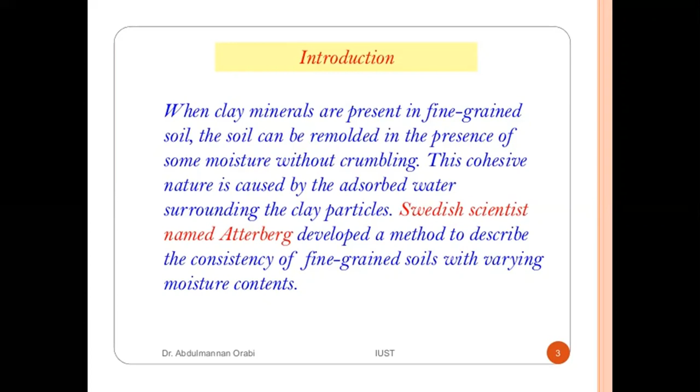This cohesive nature is caused by the adsorbed water surrounding the clay particles. A Swedish scientist named Atterberg developed the method to describe the consistency of fine-grained soils with varying moisture contents. Consistency is the term used to indicate the degree of firmness of the cohesive soil.

The physical properties of clay greatly differ at different water contents. A soil which is very soft at a higher percentage of water content becomes very hard with the decrease in water content.

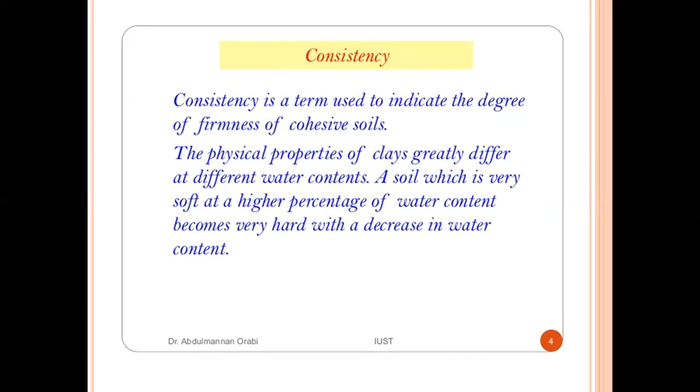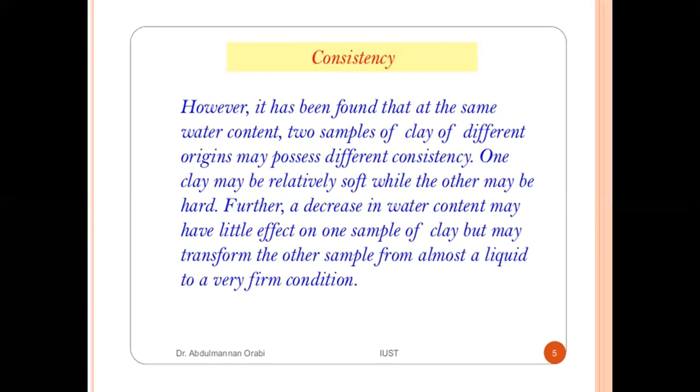However, it has been found that at the same water content, two samples of clay of different origins may possess different consistency. One clay may be relatively soft, while the other may be hard. Further decrease in water content may have little effect on one sample of clay, but may transform the other sample from almost a liquid to a very firm condition.

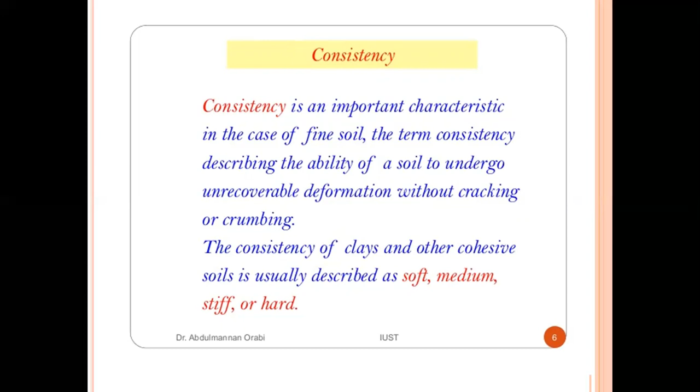Consistency is an important characteristic in the case of fine soil. The term consistency describes the ability of soil to undergo unrecoverable deformation without cracking or crumbling. The consistency of clays and other cohesive soils is usually described as soft, medium, stiff, and hard.

Water content significantly affects properties of silts and clay soils, unlike sand and gravel. Strength decreases as the water content increases, and soils swell up when water content increases. Fine-grained soils with very high water content possess properties similar to liquids.

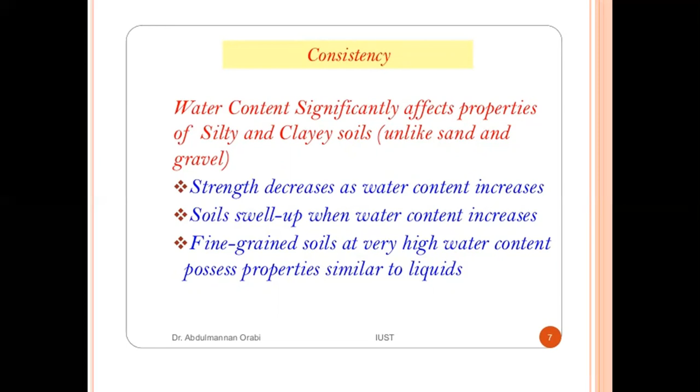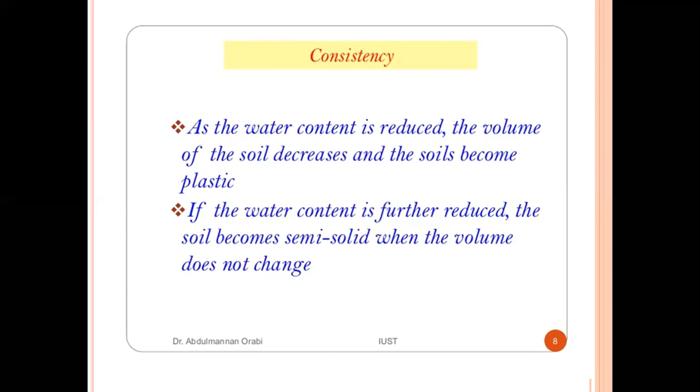As the water content is reduced, the volume of soil decreases and the soil becomes plastic, meaning it reaches the plastic state. If the water content is further reduced, the soil becomes semi-solid, where the volume does not change.

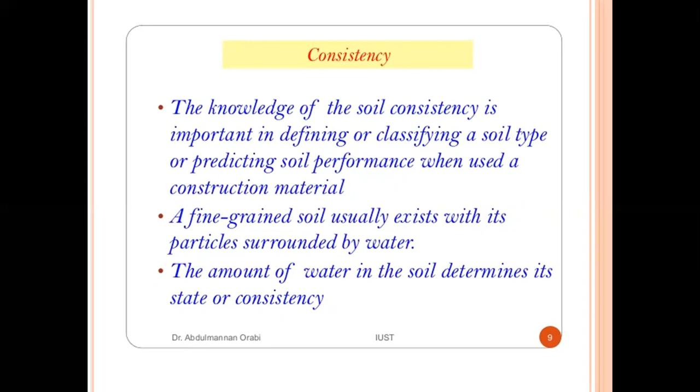Knowledge of soil consistency is important in defining or classifying a soil type, or predicting soil performance when used as a construction material. As fine-grained soils usually exist with particles surrounded by water, the amount of water in the soil determines its state or consistency.

The consistency of fine-grained soils refers to the firmness, which varies with water content of the soil. As the water content gradually increases, it causes the soil to change from solid to semi-solid to plastic to liquid states.

One state is the solid state, after which it converts to semi-solid, then changes to plastic state, then to liquid state. The water content at which the consistency changes from one state to another is called consistency limits or Atterberg limits.

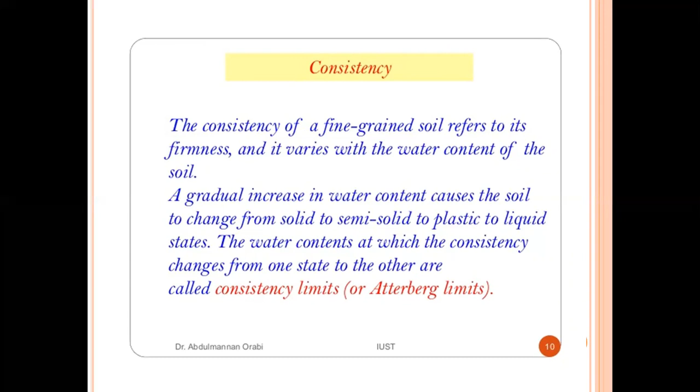At very low moisture content, soil behaves more like a solid. When the moisture content is very high, the soil and water may flow like a liquid; hence these are defined on an arbitrary basis.

Depending upon the moisture content, the behavior of the soil can be divided into four basic states: the solid state, semi-solid state, plastic state, and finally the liquid state. These are the four states defined by Atterberg limits or consistency limits.

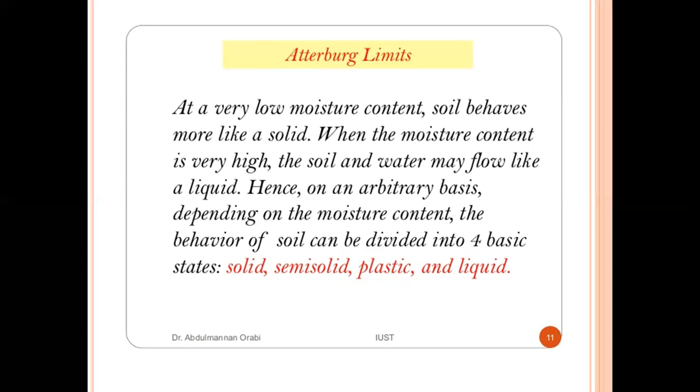So this is the Atterberg limits. The Atterberg limits are the limits of water content used to define soil behavior. This water content depends upon the soil behavior; the soil changes from one state to another state.

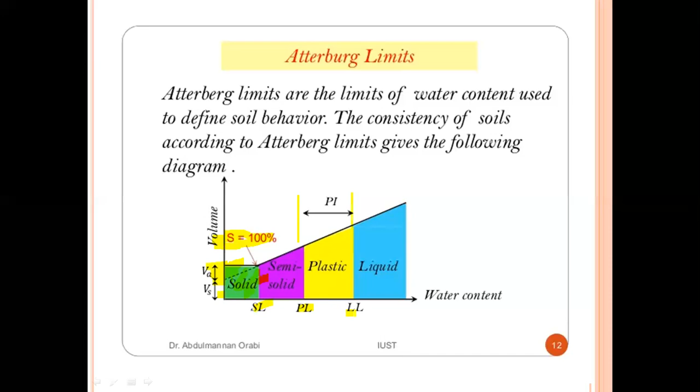Here S is the 100%, meaning saturation of the soil in solid state. The shrinkage limit is SL, plastic limit is PL, and liquid limit is LL. These three limits are known as shrinkage limit SL, plastic limit PL, and liquid limit LL.

In this, the shrinkage limit is in the solid particles, as shown in the figure below. The values of these limits can be obtained from the laboratory test.

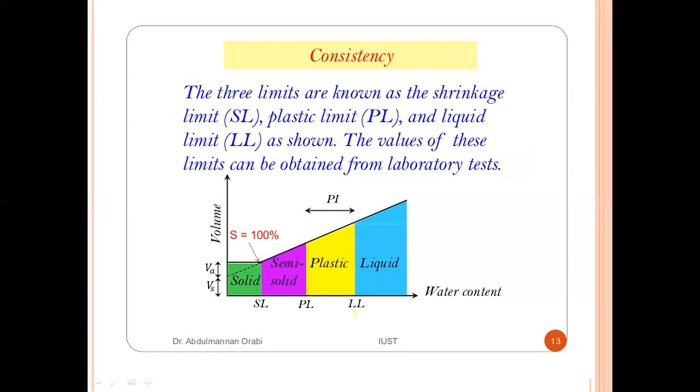The importance of the consistency limits, the Atterberg limits: if you know the water content of our sample relative to the Atterberg limits, then we already know a great deal about the engineering response of our sample.

As water content is reduced, the volume of the soil decreases and the soil becomes plastic. If the water content is further reduced, the soil becomes semi-solid, when the volume does not change.

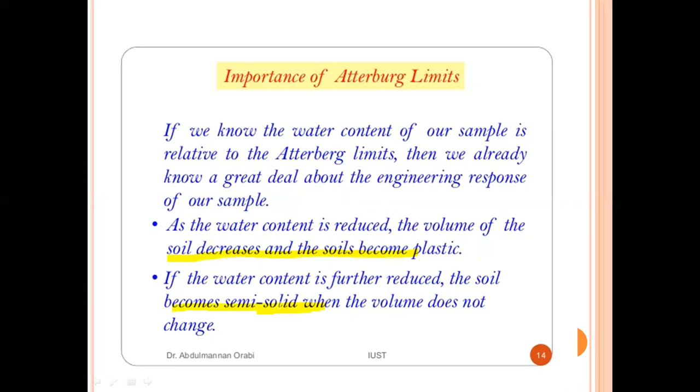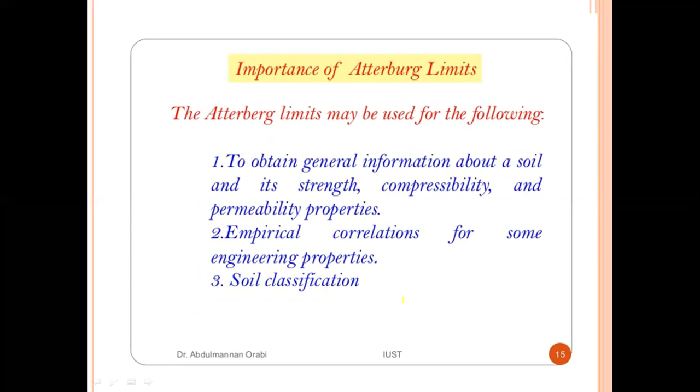Atterberg limits may be used for the following: to obtain general information about the soil's strength, compressibility and permeability properties, for empirical correlations for some engineering properties, and for soil classification.

The first one is the liquid limit. The liquid limit is defined as the water content at which the soil changes from the liquid state to the plastic state, meaning the soil's behavior changes with water content.

The liquid limit is generally determined by the standard Casagrande device. The procedure for the liquid limit test is given by ASTM D4318.

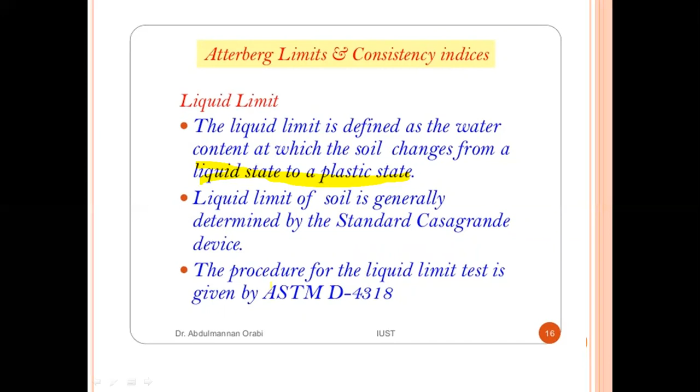Casagrande defined the liquid limit as the water content at which a standard groove cut in the remolded soil sample will close over a distance of 13 mm (half an inch) at 25 blows, with the cup falling 10 mm onto the hard rubber base.

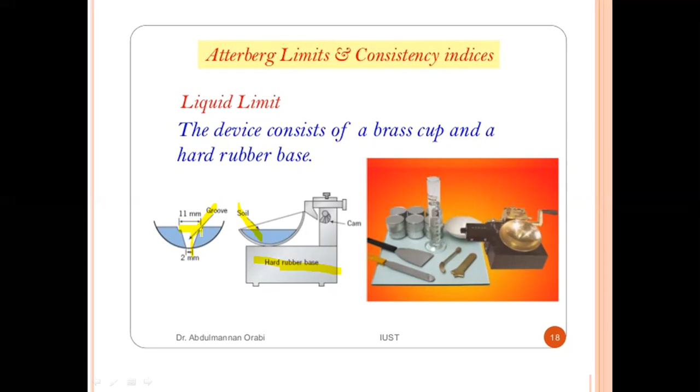The soil requires 25 blows. To perform the liquid limit test, one must place soil in the cup. A groove is then cut at the center of the soil pat using the standard grooving tool.

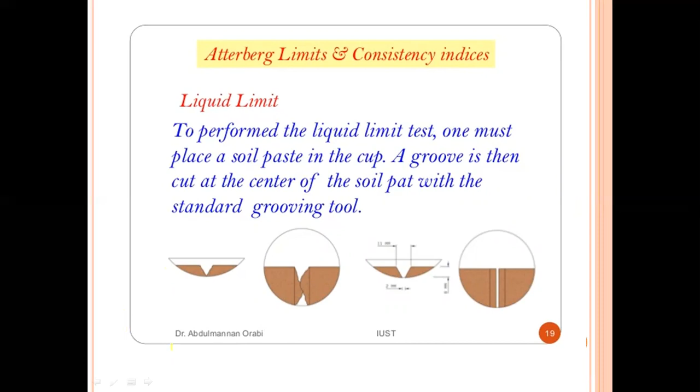The liquid limit device uses a crank-operated cam. The cup is lifted and dropped from a height of 10 mm.

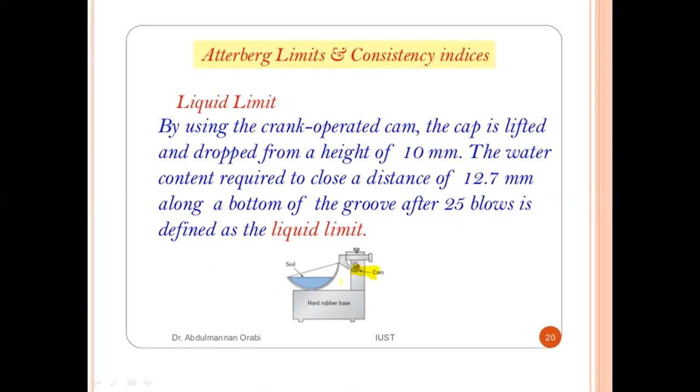The water content required to close the distance of 12.7 mm along the bottom of the groove after 25 blows is defined as the liquid limit. This shows the grooved soil pat in the liquid limit device.

See the figure: this is the grooved soil, and this is the soil pat after the groove has closed.

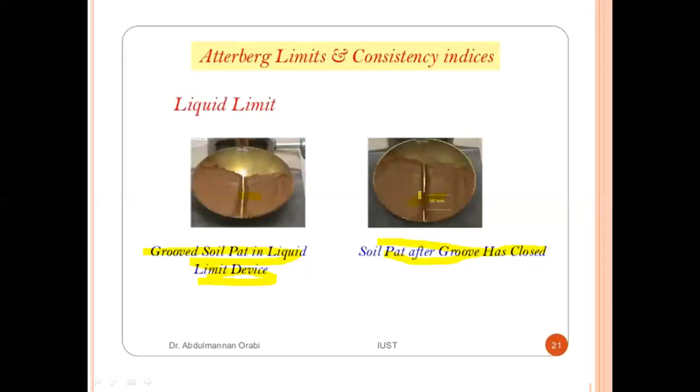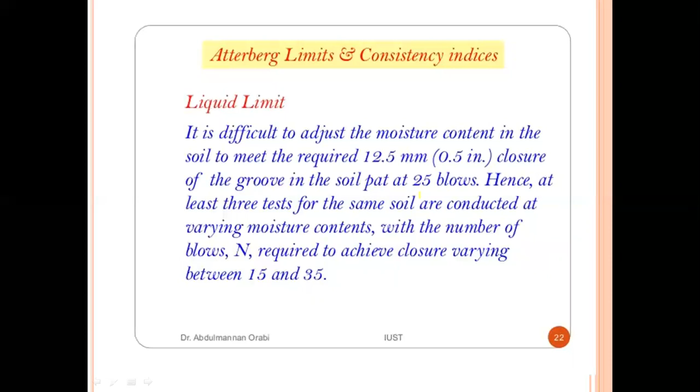It is difficult to adjust the moisture content in the soil to meet the required 12.5 mm (half inch) closure of the groove in the soil pat at 25 blows. Hence, at least 3 tests are conducted for the same soil at varying moisture content, with the number of blows (n) required for closure varying between 15 and 35.

In the liquid limit test, the moisture content of the soil (in percent) and the corresponding number of blows are plotted on semi-logarithmic graph paper. The relationship between moisture content and log n is approximated as a straight line.

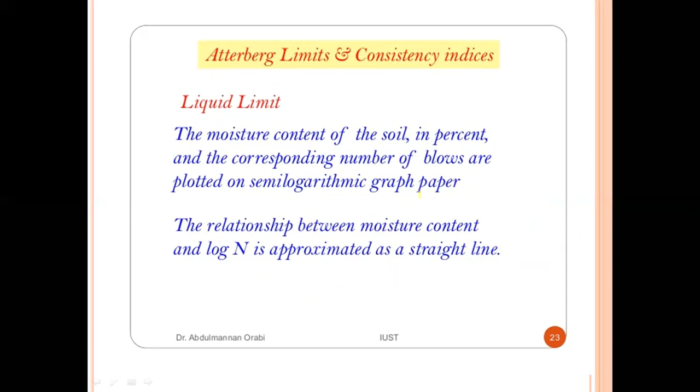Plot the number of drops (n) on the log scale versus the water content (W). Draw the best-fit straight line through the plotted points; this line is referred to as the flow curve. The moisture content corresponding to N25, determined from the flow curve, gives the liquid limit of the soil.

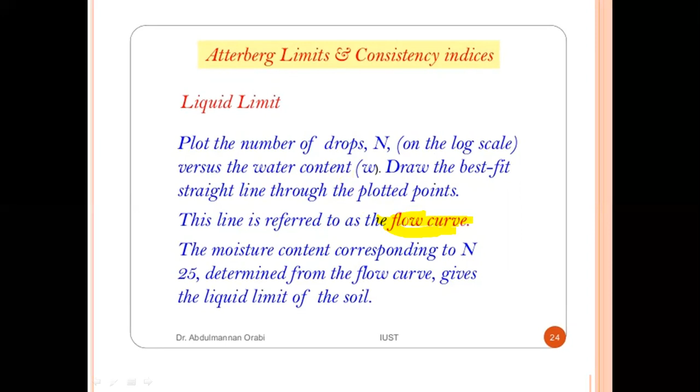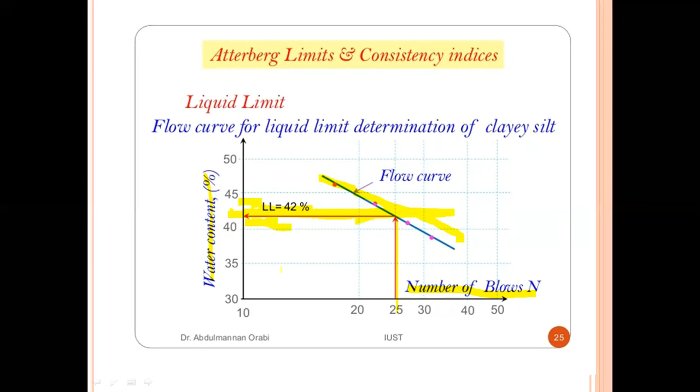Next, the US Army Corps of Engineers developed an empirical equation of the form LL (liquid limit) equals Wn times (n divided by 25) raised to the power of tan beta, where n equals the number of blows in the liquid limit device for the 12.5 mm groove closure, and Wn is the corresponding water content. tan beta equals 0.121, but note that tan beta is not equal to 0.121 for all soils.

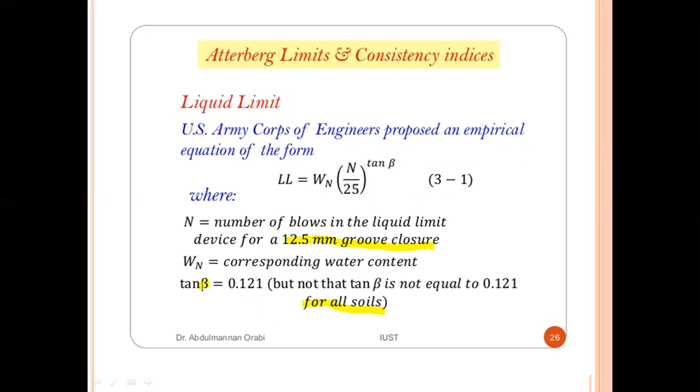The beta value changes depending on the soil. This equation generally yields good results for the number of blows between 20 and 30. Beyond this range, the yield breaks down or collapses.

This procedure is generally referred to as the one-point method and was also adopted by ASTM under designation D4318. The reason the one-point method yields fairly good results is that a small range of moisture content is involved when n equals 20 to 30 blows.

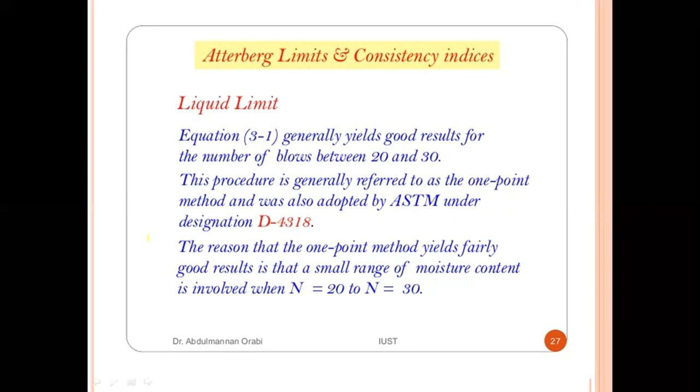The fall cone method is in the British standard BS 1377. It is another method of determining the liquid limit, popular in Europe and Asia. In this test, the liquid limit is defined as the moisture content at which a standard cone of apex angle 30 degrees and weight 0.78 newtons (80 gram-force) will penetrate a distance equal to 20 mm in 5 seconds when allowed to drop from the position of point contact with the soil surface.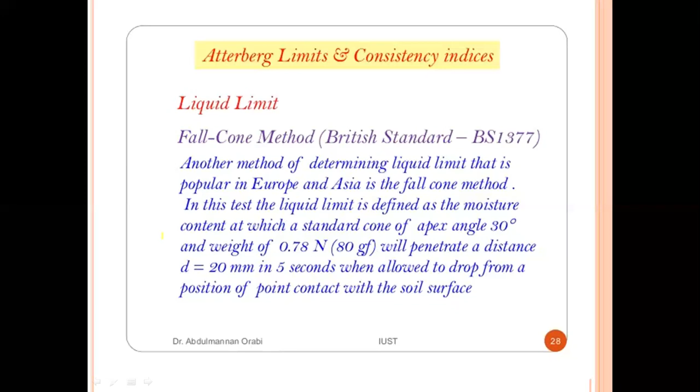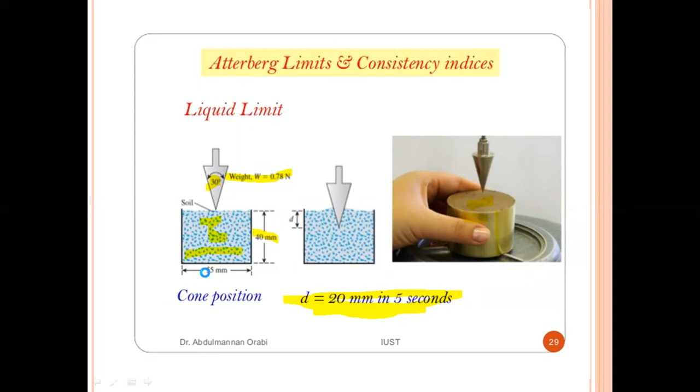This figure below shows a photograph of the fall cone apparatus.

Due to the difficulty in achieving the liquid limit from a single test, 4 or more tests can be conducted at various moisture contents to determine the fall cone penetration D. This is the fall cone penetration apparatus.

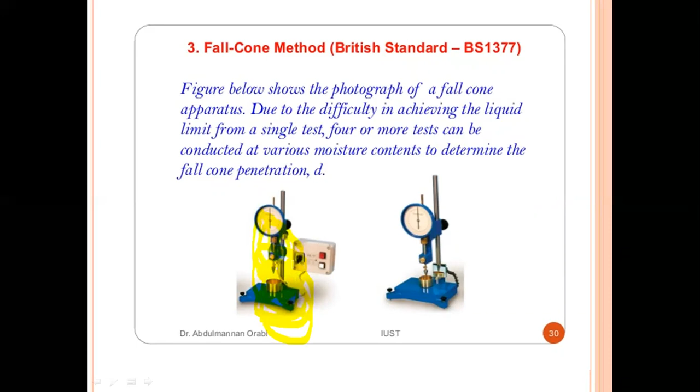A semi-logarithmic graph can be plotted with moisture content W versus cone penetration D. The plot results in a straight line. The moisture content corresponding to D equal to 20 mm is the liquid limit.

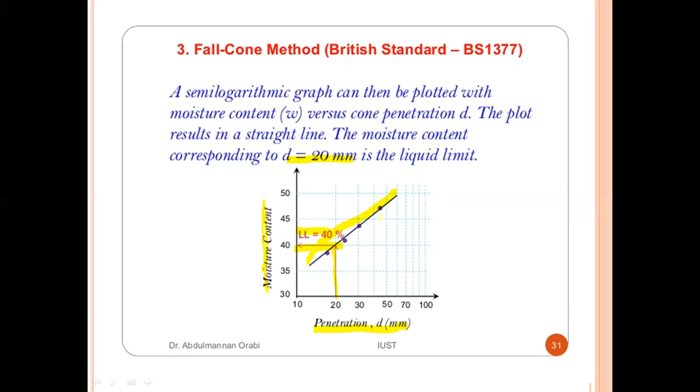This is the semi-logarithmic graph in the fall cone method.

Next, consistency limits are the Atterberg limits. The second method is the plastic limit, denoted PL, between liquid limit and plastic limit. The plastic limit is defined as the water content at which the soil changes from plastic state to semi-solid state. At this state, the soil mixture is deformed to any shape under minor pressure.

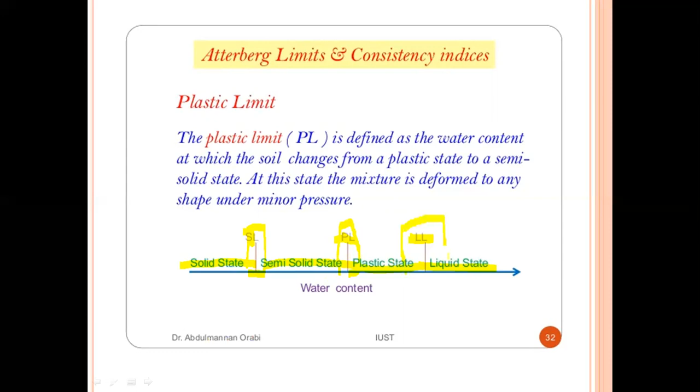So it is based on water content. First is the solid state, second is the semi-solid state, then plastic state, then liquid state. Shrinkage limit SL, plastic limit, and liquid limit mark these transitions. As water content increases, solid state converts to semi-solid state, then plastic state, then liquid state. Solid to semi-solid state transition forms the shrinkage limit; semi-solid to plastic state transition is the plastic limit; plastic state to liquid state transition forms the liquid limit.

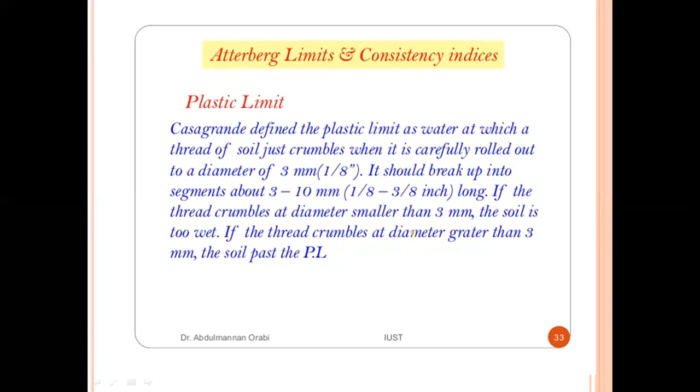Casagrande defined the plastic limit as the water content at which a thread of soil just crumbles when carefully rolled to a diameter of 3 mm (1/8 inch). It should break into segments about 3 to 10 mm (1/8 to 3/8 inches) long. If the thread crumbles at a diameter smaller than 3 mm, the soil is too wet. If it crumbles at a diameter greater than 3 mm, the soil has passed the plastic limit.

This is the plastic limit test procedure performed by hand. The plastic limit test is simple and performed by repeated rolling of an ellipsoidal-sized soil mass by hand on a ground glass plate. This process for the plastic limit test is given below, designated ASTM D4318.

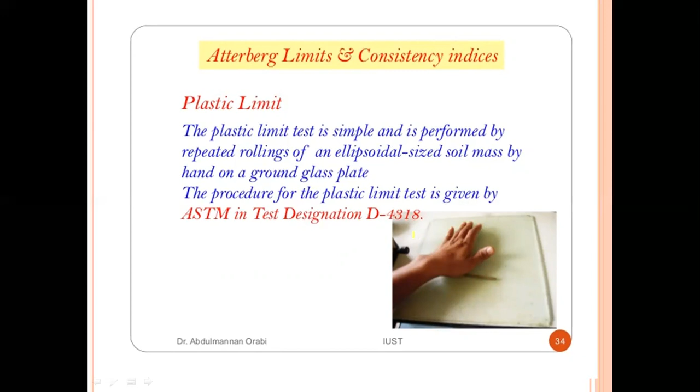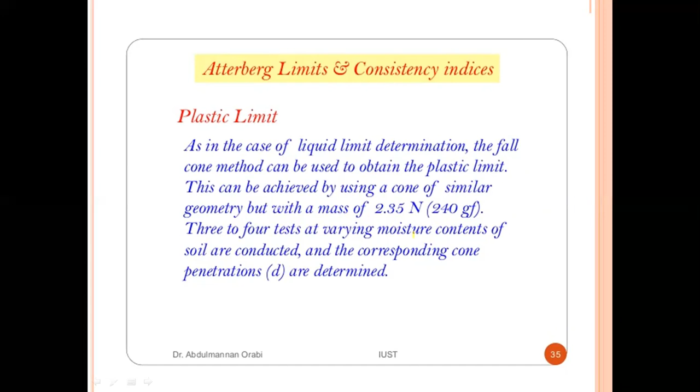As with liquid limit determination, the fall cone method can be used to obtain the plastic limit. This can be achieved using a cone of similar geometry but with a mass of 2.35 newtons, that is 240 gram-force. 3 to 4 tests at varying moisture content of soil are conducted, and the corresponding cone penetrations determined.

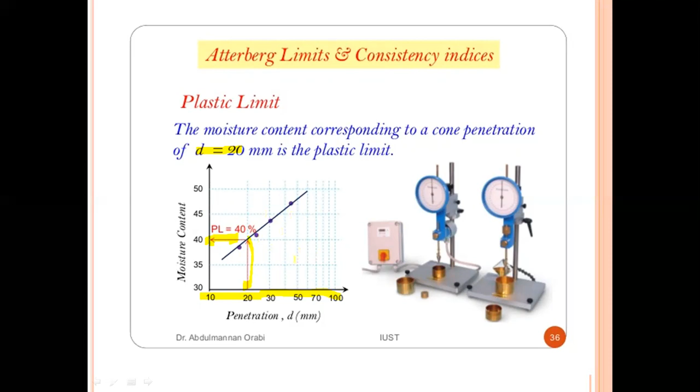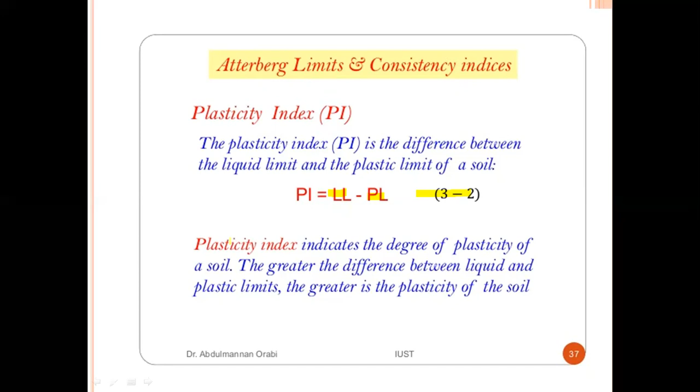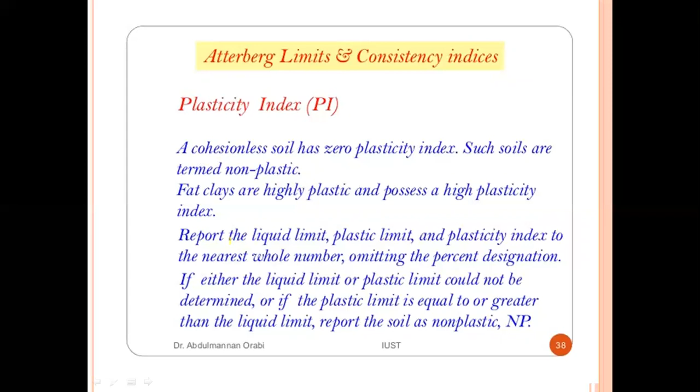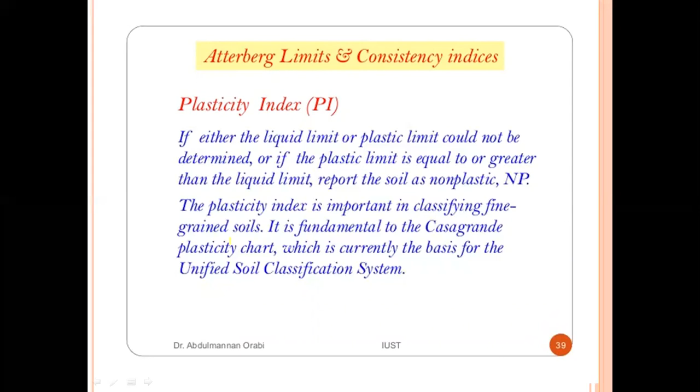Report the liquid limit, plastic limit, and plasticity index to the nearest whole number, omitting the percent designation. If either the liquid limit or plastic limit could not be determined, or if the plastic limit is equal to or greater than the liquid limit, report the soil as non-plastic, NP. The plasticity index, PI, is important for classifying fine grained soils, and is fundamental to the Casagrande plasticity chart, which is currently the basis for the unified soil classification system.

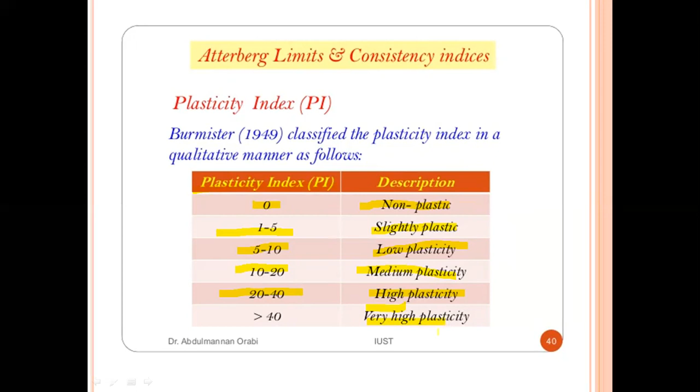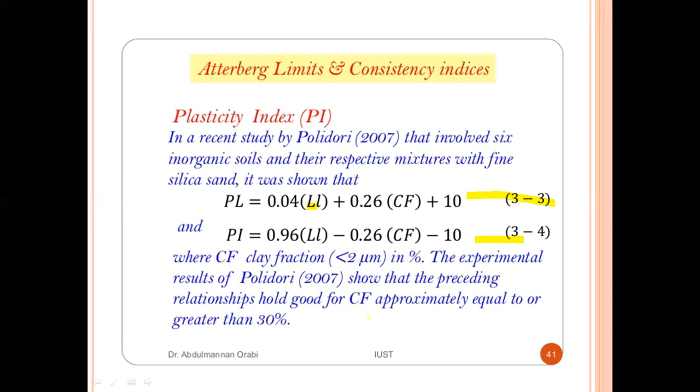The experimental results of Polidori 2007 show that the preceding relationship holds good for CF, clay fraction, approximately equal to or greater than 30 percent.

Report the liquid limit, plastic limit, and plasticity index to the nearest whole number, omitting the percentage designation. If either the liquid limit or plastic limit could not be determined, or if the plastic limit is equal to or greater than the liquid limit, report the soil as non-plastic, NP.

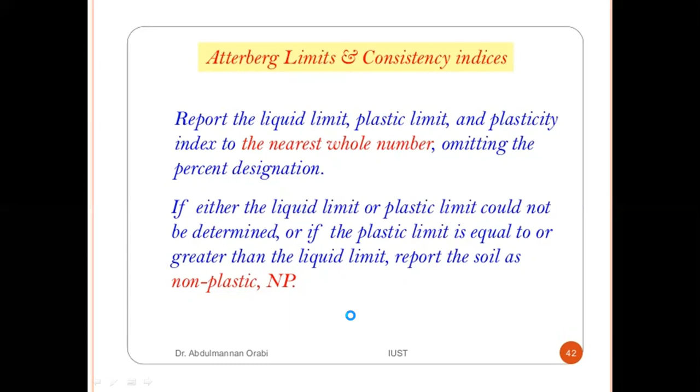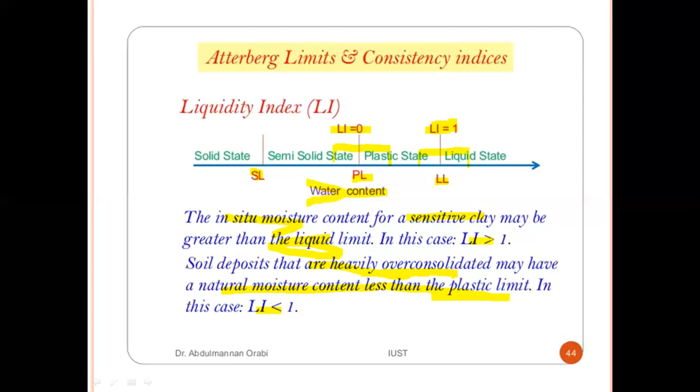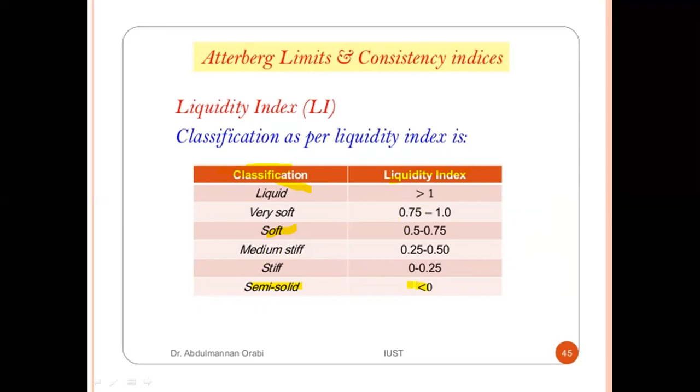Next, the consistency index, CI. From semi-solid state to plastic state, consistency index CI is 1, and from plastic state to liquid state, CI is 0.

We know the shrinkage limit, plastic limit, and liquid limit. CI is the ratio of liquid limit minus the natural water content to the plasticity index. So consistency index CI equals LL minus WC divided by PI, where WC is the moisture content of the soil. This is equation 6.

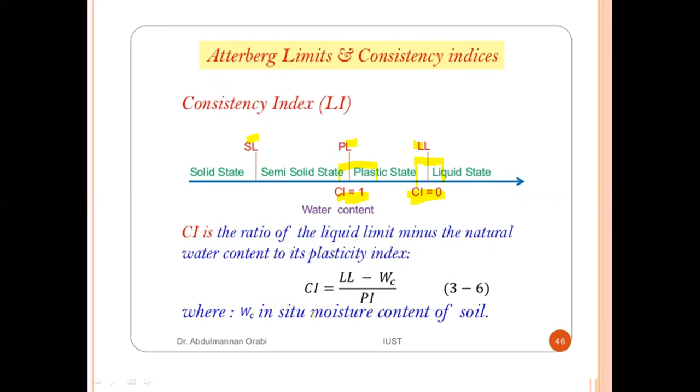Next, clayey soil does not necessarily consist of 100% clay size particles. The proportion of clay mineral flakes less than 0.002 mm in size in the fine soil increases its tendency to swell and shrink with changes in water content. This is called the activity of the clayey soil, and it represents the degree of plasticity related to the clay content.

Activity of the soil is the ratio of plasticity index to the percentage of particle sizes finer than 2 micrometers.

So A equal to PI by percentage by weight of the finer than 2 micrometer. This is equation 7.

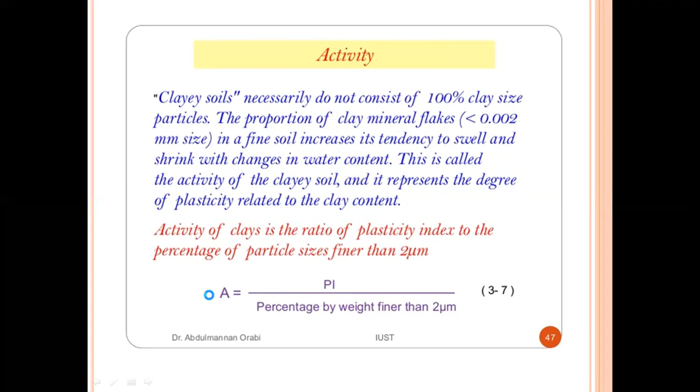Based on equations 3 and 4, Polidori provided an empirical relationship for activity: for CF, clay fraction, equal to or greater than 30%, PL equal to 0.96 LL minus 0.26 CF minus 10 divided by CF. This is equation 8.

Classification as per activity: activity A less than 0.75 is inactive clay, 0.75 to 1.25 is normal clay, and greater than 1.25 is active clay.

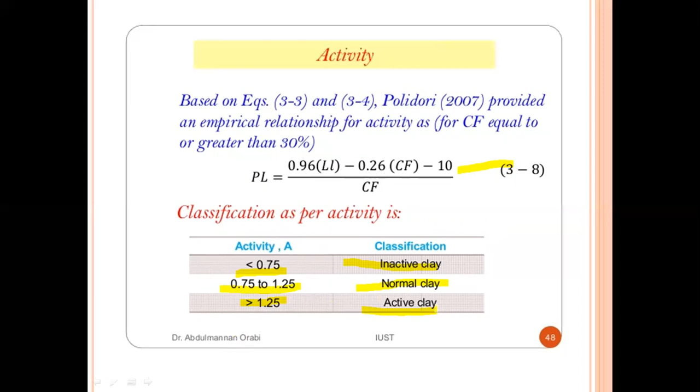Shrinkage limit, SL, is the moisture content in percent at which the volume of the soil mass ceases to change, defined as shrinkage limit.

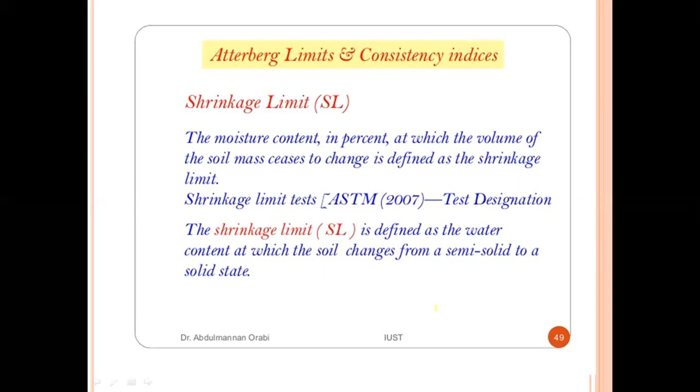Shrinkage limit test as per ASTM 2007 test designation. The shrinkage limit SL is defined as the water content at which the soil changes from semi-solid to the solid state. Okay, clearly, it is the shrinkage limit. The shrinkage limit is determined as follows.

A mass of wet soil M1 is placed in a porcelain dish 44.5 mm in diameter and 12.5 mm high, and then oven dried. The volume of the oven-dried soil is determined by using mercury to occupy the vacant spaces caused by the shrinkage.

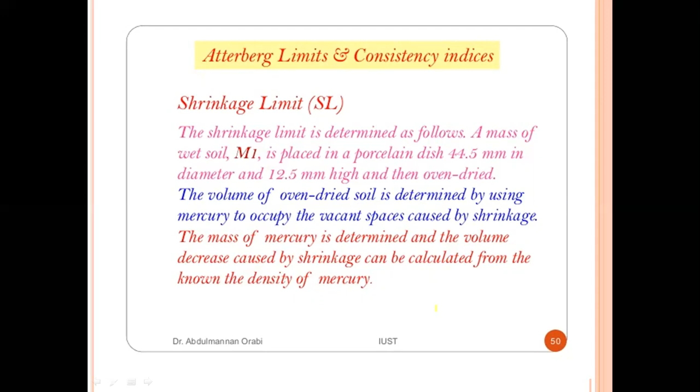The mass of mercury is determined, and the volume decrease caused by shrinkage can be calculated from the known density of mercury. So the shrinkage limit is calculated from SL equal to M1 minus M2 minus V1 minus V2, where M1 and M2 are the masses of the soils, V1 and V2 are the initial and final volumes, divided by M2.

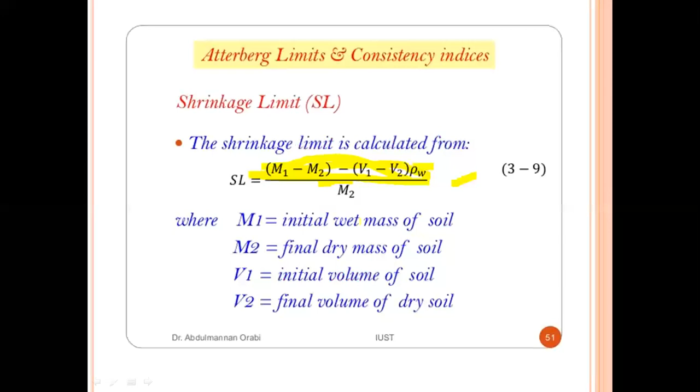Rho W is the density of water, where M1 is the initial wet mass of the soil and M2 is the final dry mass of the soil. V1 is the initial volume of the soil, V2 is the final volume of dry soil. This is the shrinkage limit.

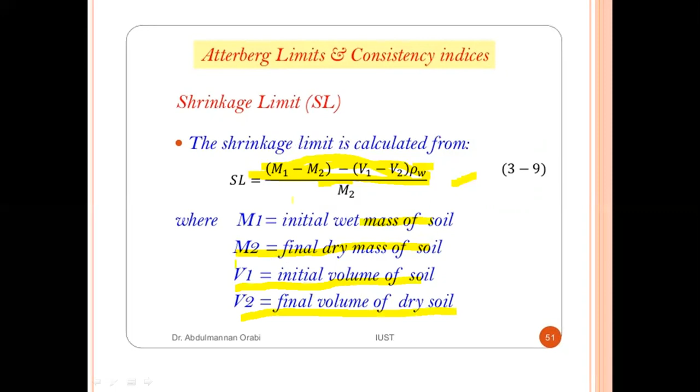Shrinkage limit: soil pat before drying and soil pat after drying. So the soil pat before drying means the initial volume and initial wet mass are taken, and after the porcelain dish and after drying, the final volume of dry soil and final dry mass are taken.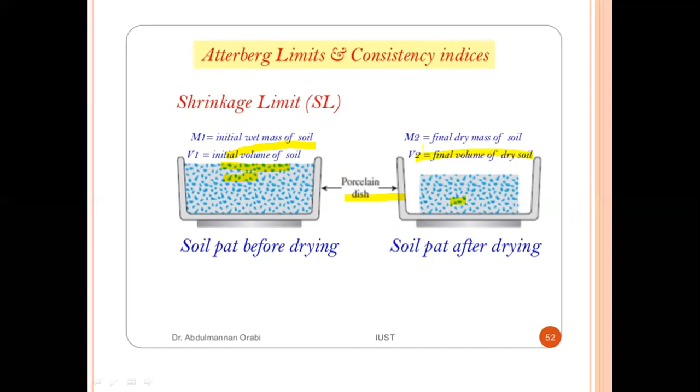Shrinkage ratio is another parameter that can be determined from the shrinkage limit test. It is the ratio of the volume change of the soil as a percentage of the dry volume to the corresponding change in moisture content. SR, shrinkage ratio, equals M2 by V2 into rho W, where M2 is the final dry mass and V2 is the final dry volume. This is equation 10.

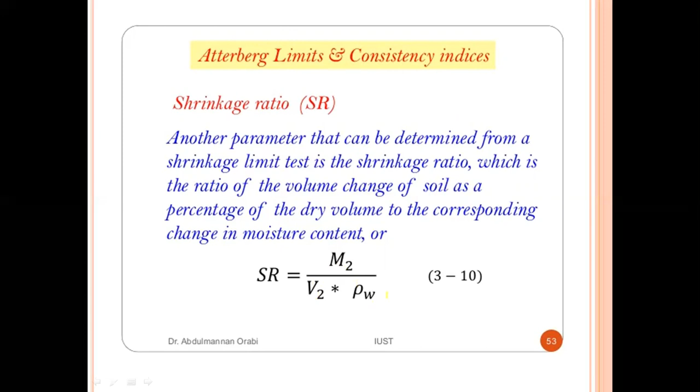From the shrinkage ratio, we can also find the specific gravity: GS equal to 1 by SR minus SL by 100, where SR is the shrinkage ratio, SL is the shrinkage limit, and GS is the specific gravity of the soil solids. This is equation 11.

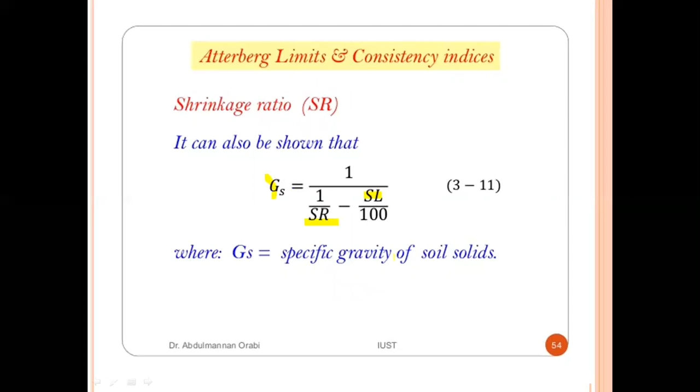Okay, clearly all of you? There is also a plasticity chart, and the A line separates the inorganic clays from the inorganic silts. Inorganic clay values lie above the A line and values of inorganic silts lie below the A line. Organic silts plot in the same region as inorganic silts of medium compressibility.

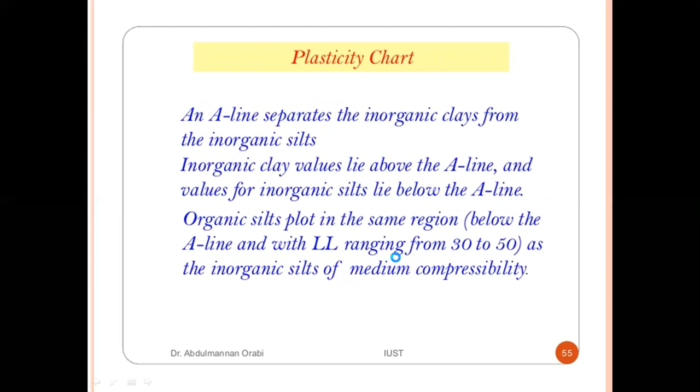Organic clays plot in the same region as inorganic silts of high compressibility. The U line is approximately the upper limit of the relationship between plasticity index and liquid limit for any currently known soil. This is the plasticity chart.

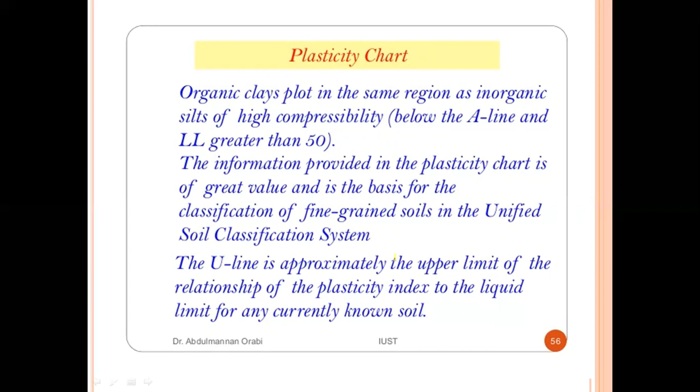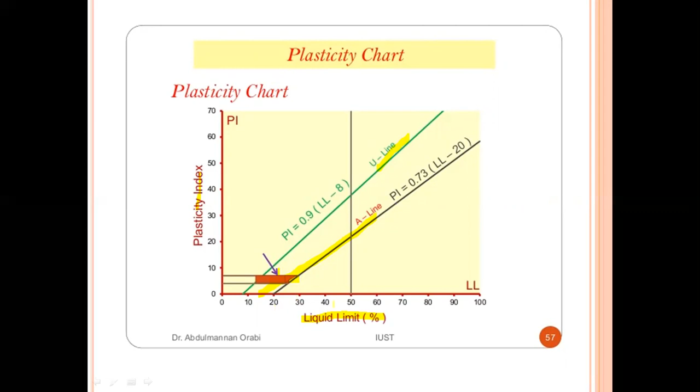So PI is 0.73 into LL minus 20 for the A line.

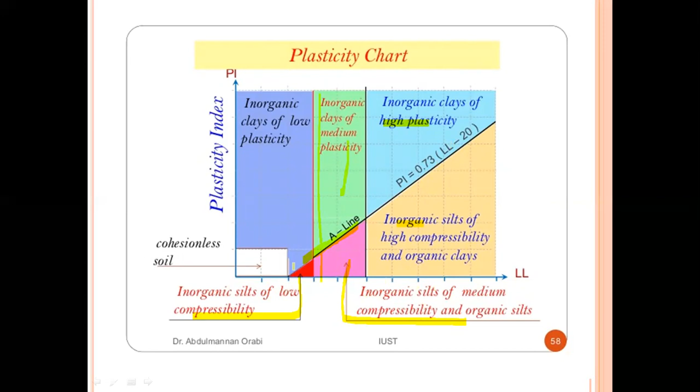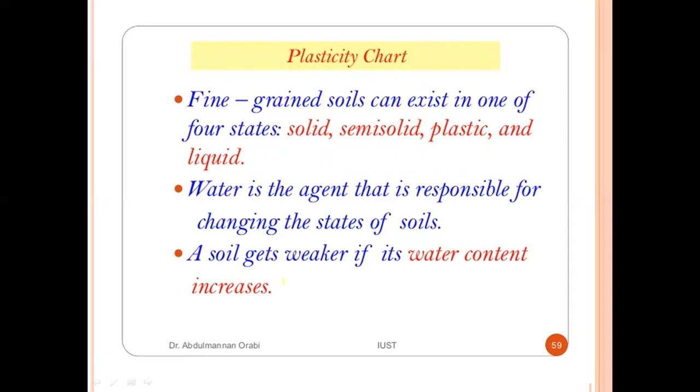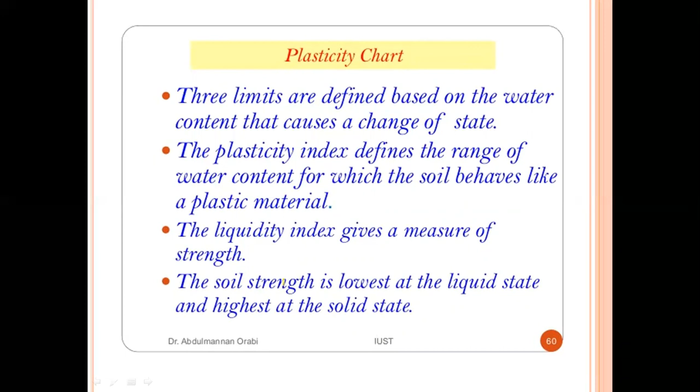Fine grained soils can exist in one of four states: solid, semi-solid, plastic, and liquid. Water is the agent responsible for changing the states of soil. A soil gets weaker as water content increases. Three limits are defined based on the water content that causes changes in state. The liquidity index gives a measure of strength; soil strength is lowest at the liquid state and highest at the solid state.